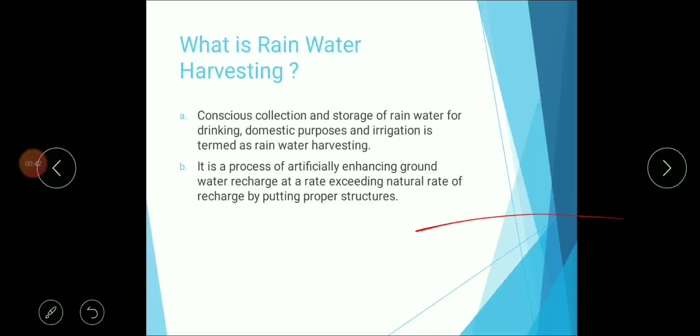Before going to the techniques, we should know the definition of rainwater harvesting. Rainwater harvesting is defined as the collection and storage of rainwater for drinking, domestic purposes, and irrigation, or it is the process of artificially enhancing groundwater recharge at a rate exceeding the natural rate of recharge by putting proper structures.

This indicates the why to harvest rainwater, meaning the objective of rainwater harvesting, or the necessity of rainwater harvesting. Let us see one by one.

First, to conserve surface water runoff during monsoon and to augment the groundwater table. Second, to improve the quality of groundwater. Third, to save energy in lifting water. A 1 meter rise in water level saves 0.4 kilowatt hour of energy.

Fourth, to reduce soil erosion. We can easily reduce soil erosion by providing the rainwater harvesting technique. Fifth, by providing rainwater harvesting, we can easily prevent seawater ingress in coastal regions or coastal areas.

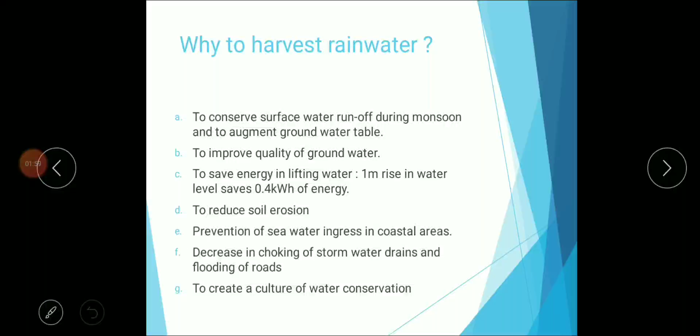Sixth, decrease in choking of stormwater drains and flooding of roads. We can easily prevent flooding of roads as well as choking of stormwater drains by providing rainwater harvesting. Seventh, to create a culture of water conservation.

So here are some of the techniques of rainwater harvesting in urban and rural areas. I have already listed the techniques of rainwater harvesting in urban areas: first, recharge pit; second, recharge trench; third, tube well; fourth, recharge well.

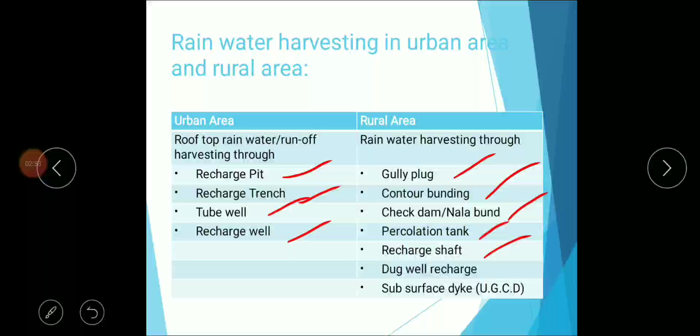Similarly, some of the techniques of rainwater harvesting for rural areas: first, gully plug; second, contour bunding; third, check dam, also called nala bund; fourth, percolation tank; fifth, recharge shaft; sixth, dug well recharge; seventh, subsurface dike.

So what are the salient features of groundwater recharge techniques? First, the quantum of water to be recharged is large, meaning the quantity of water is large.

Second, space available for recharge is also in plenty, meaning more space is available for recharge of water. Third, therefore surface spreading techniques are common for rural groundwater recharge. Fourth, the watershed is considered as a unit.

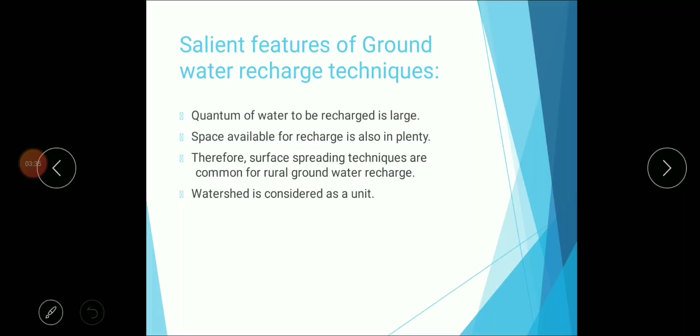Let us see one by one the techniques for groundwater recharge in rural areas. The first one is gully plug.

Gully plugs are provided in hilly slopes extremely. They are built along hilly slopes across gullies or small streams. Gullies are nothing but deep channels in a land. They are built using locally available stone, clay, etc.

And a better selection is where the slope breaks, so as to have some storage behind. By providing the gully plug, we can easily prevent soil erosion and conserve soil moisture. Here the gully plug is constructed with vesicular basalt and clay.

Here the water table is shown, and these are the masonry units.

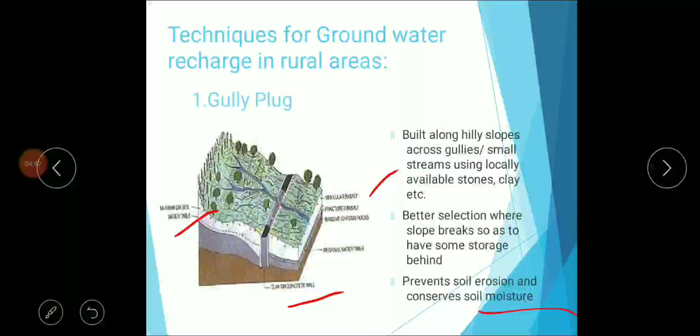Second, contour bund. These are suitable in low rainfall areas. Where rainfall is low, we construct contour bunds, by constructing bunds on sloping grounds, all along the contour of equal elevation. We already know the definition of contour - it is the same elevation. The flowing of water is intercepted before it attains erosive velocity by keeping suitable spacing between the bunds.

It is one of the effective methods to conserve soil moisture in the watershed for a long duration. By providing the contour bund, we can easily ensure conservation of soil.

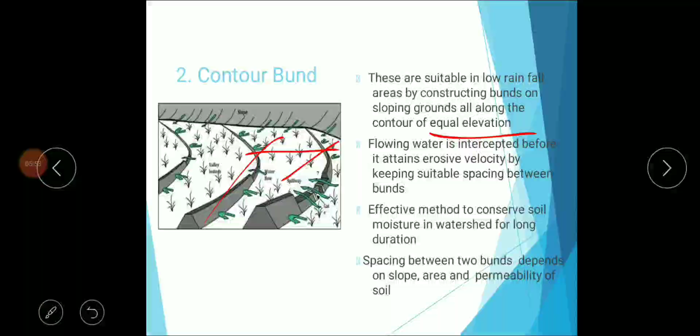The spacing between two bunds depends upon the slope. This spacing between the two bunds depends upon the slope, area, and permeability of soil. We already know the meaning of permeability - it is the percolation of water through the soil voids.

Third, check dam, also called Nala Bund. These are constructed across a stream with a gentle slope.

These dams should have sufficient thickness of permeable bed, with water confined within the bank of the stream. The height of the dam should generally not exceed 1.5 to 2 meters. The excess water flows above the wall.

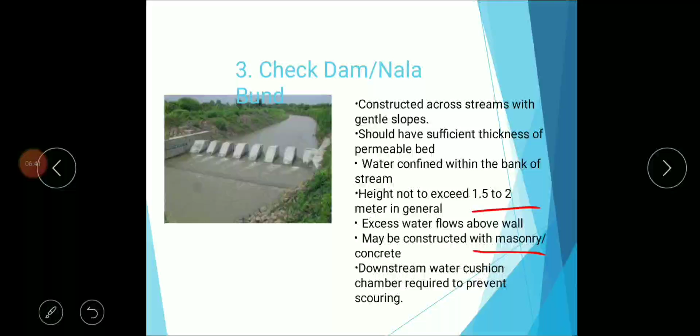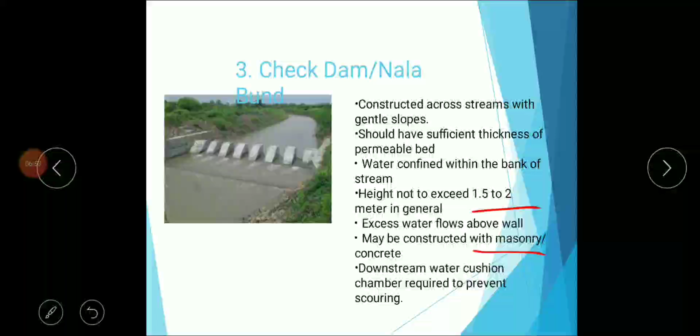It may be constructed with masonry or concrete. A downstream water cushion chamber is required to prevent scouring. So here one chamber is provided, called the cushion, provided at the downstream side. By providing this, we can easily prevent the scouring.

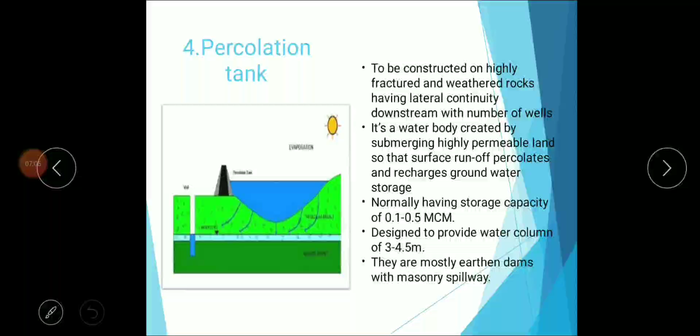Fourth one, percolation tank. It is to be constructed on highly fractured or weathered rock, having lateral continuity, especially on the downstream side, with a number of wells. It is a water body created by submerging highly permeable land so that the surface runoff percolates and recharges groundwater storage.

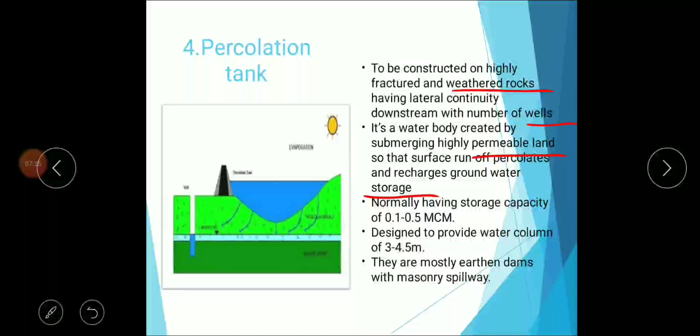Normally, the percolation tank has a storage capacity of 0.1 to 0.5 MCM (million cubic meter), designed to provide a water column of 3 to 4.5 meters. So the percolation tank is to be designed by providing the water column. The height of the water column is 3 to 4.5 meters in general.

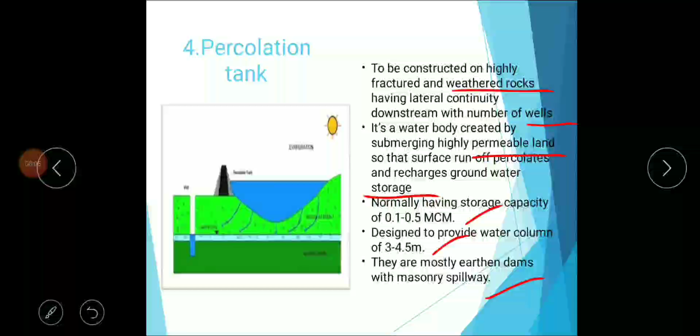They are mostly earthen dams with masonry spillway. So percolation tanks are constructed with the help of soil. Here one spillway is there, constructed with the help of masonry, either in concrete or in brick masonry. Fifth one, recharge shaft.

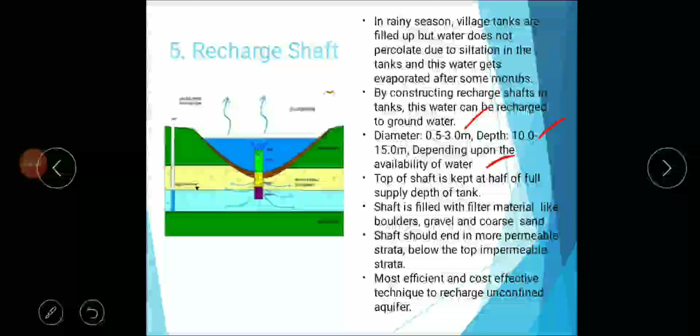This arrow mark indicates the evaporation of water. The shaft is filled with filter material like boulders, gravel, and coarse sand. The shaft should end in more permeable strata below the top impermeable strata.

So here two zones are there, one is permeable and another one is impermeable strata. This is one of the most efficient and cost effective techniques to recharge an unconfined aquifer.

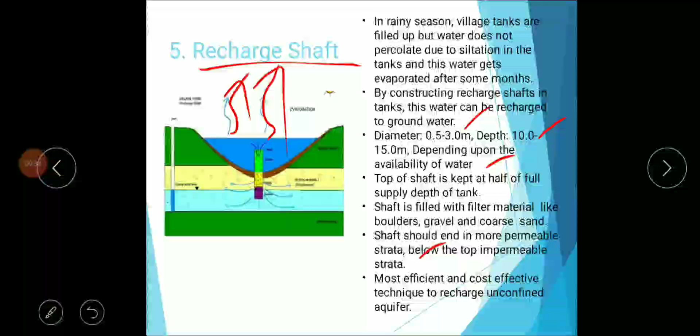Sixth one, dug well recharge. Existing and abandoned dug wells may be utilized as recharge structures after cleaning and desilting the same.

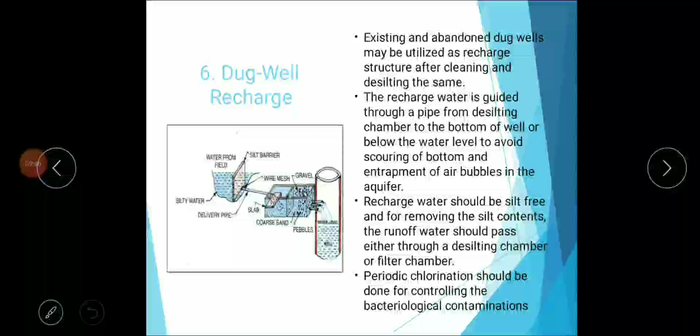The recharge water is guided through a pipe from the desilting chamber to the bottom of the well, or below the water level, to avoid scouring of the bottom and entrapment of air bubbles in the aquifer.

Recharge water should be silt free, and for removing the silt contents, the runoff water should pass either through a desilting chamber or filter chamber. Periodic chlorination should be done for controlling bacteriological contaminants.

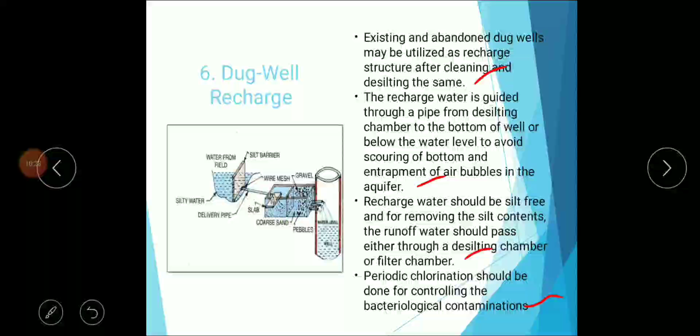Seventh one, subsurface dyke. The subsurface dyke or underground dam is a subsurface barrier across a stream which retards the base flow and stores water upstream below the ground surface. By doing so, the water levels in the upstream part of the groundwater dam rises, saturating the otherwise dry part of the aquifer.

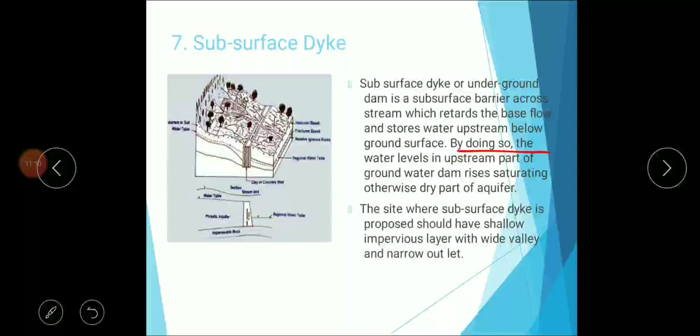The site where a subsurface dyke is proposed should have a shallow impervious layer with a wide valley and a narrow outlet. So these are constructed at a shallow impervious layer, where the valley is wide and the outlet is narrow.

After selection of a suitable site, a trench of 1 to 2 meters wide is dug across the breadth of the stream down to the impermeable bed. The trench may be filled with clay or brick, concrete wall up to 0.5 meters below the ground level.

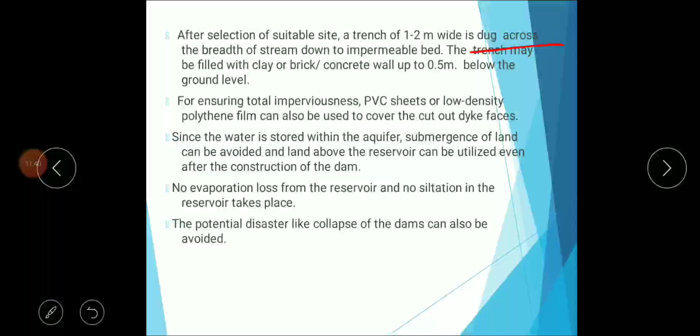For ensuring total imperviousness, PVC sheets or low density polythene film can be used to cover the cut out dyke faces. Since the water is stored within the aquifer, submergence of land can be avoided, and land above the reservoir can be utilized even after construction of the dam. There is no evaporation loss from the reservoir, no siltation in the reservoir takes place, and the potential disaster of dam collapse can also be avoided.